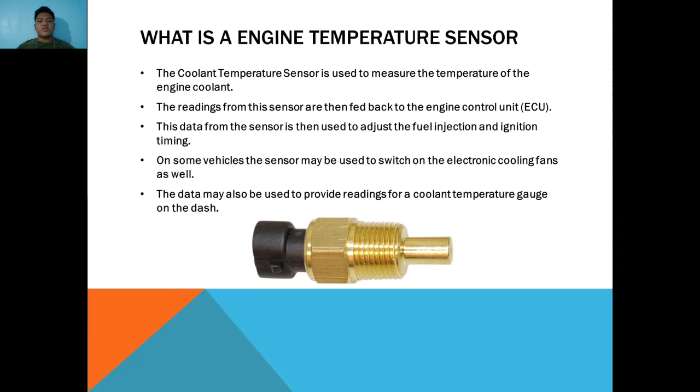But first, what is an engine temperature sensor? A coolant temperature sensor is used to measure the temperature of the engine coolant. The readings from this sensor are fed back to the engine control unit, which uses this data to adjust the fuel injection and ignition timing. On some vehicles, the sensor may also switch on the electronic cooling fans. The data may also provide readings for a coolant temperature gauge on the dash.

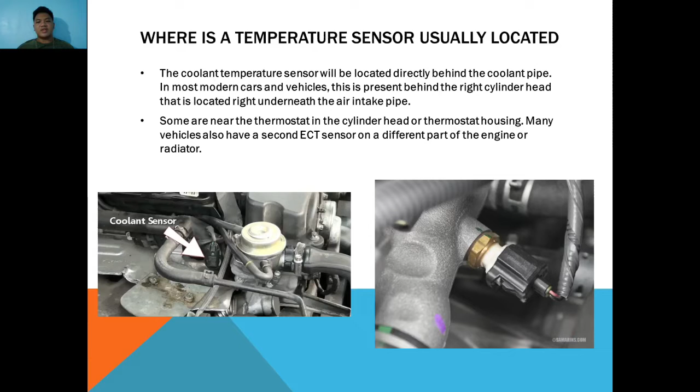Where is a temperature sensor usually located? The coolant temperature sensor will be located directly behind the coolant pipe. In most modern cars and vehicles, this is present behind the right cylinder head, located right underneath the air intake pipe. Some are near the thermostat in the cylinder head or thermostat housing. Many vehicles also have a second ECT sensor on a different part of the engine or radiator.

What does an ECT inform the ECU? When the engine is cold, the ECU adjusts the fuel mixture to be richer than normal to prevent the engine from stalling and stumbling. When it's warm, the engine gets a leaner than normal fuel mixture to maximize fuel economy while releasing the lowest possible exhaust emissions.

The ECT sensor is a high authority sensor whenever the engine is cold because ignition timing is tailored according to the engine coolant temperature. It also provides input for idle air control position, oxygen sensor closed loop status, on-off times for the canister purge, and idle speed.

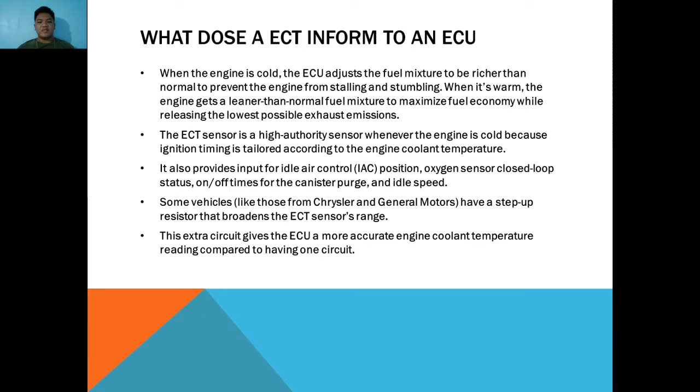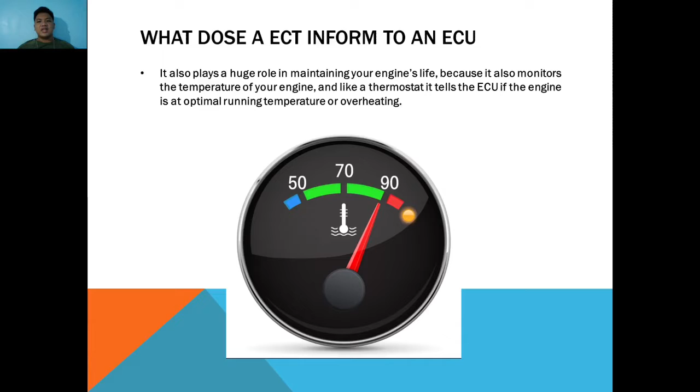Some vehicles, like those from Chrysler and General Motors, have a step-up resistor that broadens the ECT sensor's range. This extra circuit gives the ECU a more accurate engine coolant temperature reading compared to having one circuit. It also plays a huge role in maintaining your engine's life because it monitors the temperature of your engine, and like a thermostat, it tells the ECU if the engine is at optimal running temperature or overheating.

If the ECT sensor sends the wrong signal to the PCM, the engine is hot or cold when it's not. The computer can produce an incorrect air-fuel mixture and cause the engine to consume too much fuel.

Hard starting engine. The ECU relies on the ECT sensor to control the spark timing and the amount of fuel to be injected into the engine. So if the sensor fails, you could have a difficult time getting the engine to start.

Overheating engine. In most vehicles, the cooling fan uses the same sensor as the one on the engine coolant, which means it also relies on the ECU for input. If the ECU receives the wrong signal from the ECT sensor, it can stop the fan from working and cause the engine to overheat.

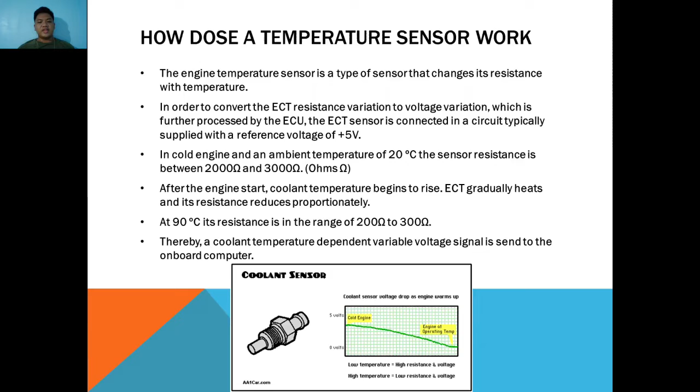Rough idling. An incorrect fuel mixture due to a faulty ECT sensor can cause the vehicle to have a rough idle.

Illuminated check engine light. Any problem with the ECT sensor and its circuit can trigger the check engine light.

Black smoke emission. A faulty ECT sensor can cause the ECU to produce a richer than normal fuel mixture, as the excess fuel burns inside the tailpipe it might produce thick black smoke.

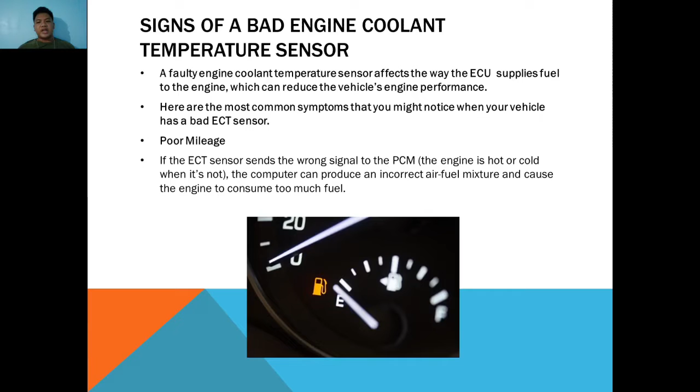Trouble codes related to a faulty ECT sensor. A problem with the ECT sensor can cause the ECU to log a diagnostic trouble code, DTC. Here are the most common ones that a scan tool might recognize.

P0116 code: engine coolant temperature sensor 1, circuit range performance. This DTC is triggered by the ECU after it detects that the voltage signals relayed by the engine coolant temperature sensor falls outside the normal manufacturer specific range.

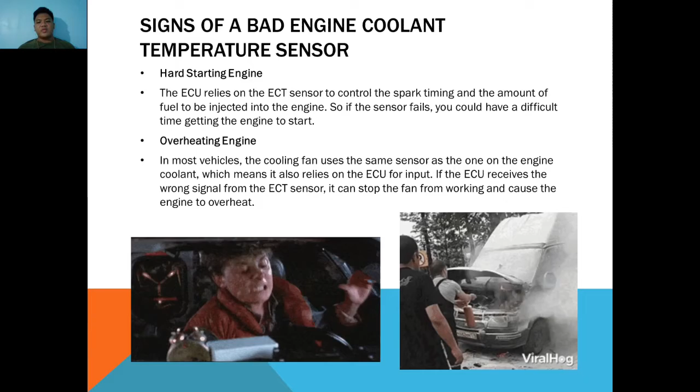P0115 code: engine coolant temperature sensor 1 circuit. This code sets when the ECU detects erratic or irrational input signals coming from the engine coolant temperature sensor circuit. The code may also register if the ECU detects an abnormally low or high voltage signal from the engine coolant temperature sensor circuit. The 1 portion of the code points to sensor number 1 in vehicles with two coolant temperature sensors.

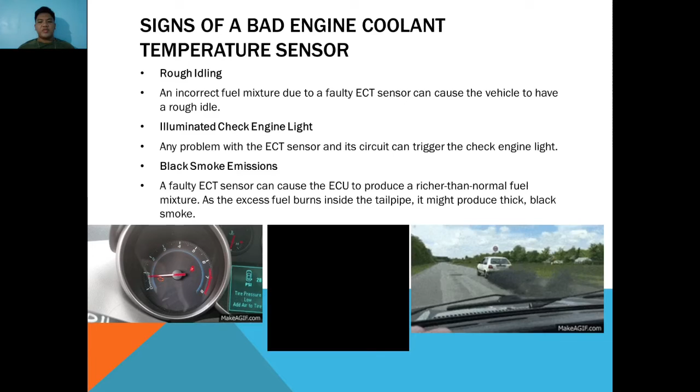P2185 stands for Engine Coolant Temperature Sensor 2, High Circuit. This code sets when the ECU detects an electrical fault in the engine coolant temperature circuit. The ECU monitors the voltage change from the ECT sensor to determine the coolant's temperature. If the ECT reads less than the expected temperature when the engine has been running for more than a few minutes, the ECU determines a fault and sets P2185. The ECU can also set this code if the ECT sensor's resistance does not match the expected values.

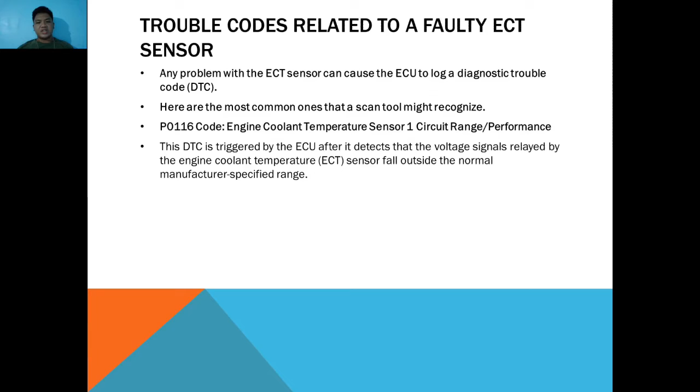P0117 code: Engine Coolant Temperature Sensor 1 Circuit Low. It indicates that the vehicle ECU has detected a low voltage input from the engine coolant temperature sensor 1. Once the ECU detects a signal voltage that's lower than the normal operating range of the sensor, the OBD code P0117 registers in your vehicle's memory. The low signal that the ECU detects from the ECT sensor can mean that the engine coolant is excessively hot.

P0119 code stands for Engine Coolant Temperature Sensor 1 Circuit, Intermittent Erratic. This trouble code sets when the ECU perceives that the input signal from the engine coolant temperature sensor is intermittent or erratic for a set period of time. If the vehicle has two coolant temperature sensors, the number 1 portion of the code points to sensor number 1.

Diagnosing ECT sensors: Before starting, check what type of temperature sensor you have. With negative temperature coefficient, these are the most popular sensors used in cars; the resistance decreases with the increase of temperature. With positive temperature coefficient, used in some older systems such as Renix, the voltage and resistance increase with the rise of temperature. You should also have a voltmeter.

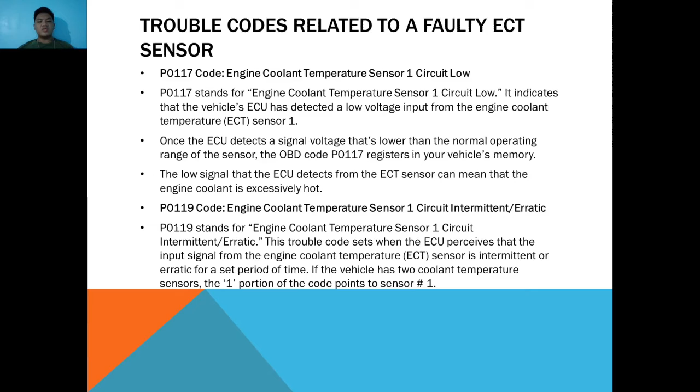Depending on the temperature, voltage reading should be in the range of 2 volts to 3 volts. The relationship between the voltage and the temperature is shown in this table. It should be around 2 to 3 volts in cold starts, because normal ambient temperature is 20 to 30 degrees Celsius.

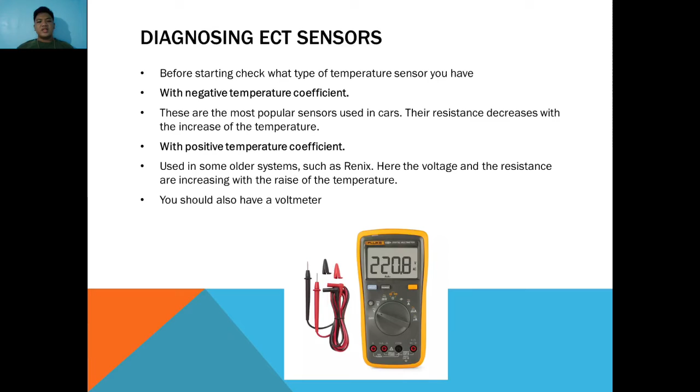Check whether the ECT voltage signal corresponds to the temperature. You will need a thermometer for this purpose. Start the engine and warm it to the operating temperature. During engine warming, the voltage should decrease in accordance with the values given in Table 1.

A common problem is that the output resistance and voltage change incorrectly, beyond its normal range. The normal value of the ECT sensor voltage is 2 volts at cold engine and 0.5 volts at warm engine. A defective sensor can indicate a voltage of 1.5 volts at cold engine and 1.25 volts at warm engine, thus causing difficulties starting a cold engine, and a rich fuel mixture when the engine is warm.

This will not generate any fault codes if the onboard controller is not programmed to detect these voltage changes, since the sensor continues to operate within the designed parameters. If such a defect is found, the ECT sensor must be replaced.

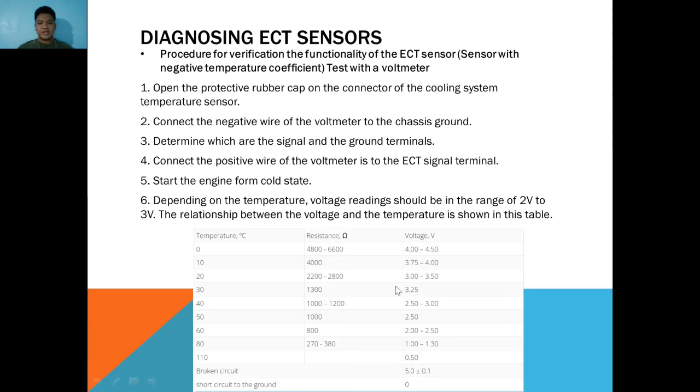If the ECT voltage signal is equal to 0, there is a lack of power supply or a short circuit to the ground. If it is 5 volts, we have an open circuit.

Sensors with a positive temperature coefficient: ECT sensors with a positive temperature coefficient of resistance is a thermistor whose resistance increases with rising temperature. It is used in a small number of systems, mainly in Renix cars. The overall method of verification is similar to the method for checking a sensor with negative temperature coefficient, described above. Received measurement data can be compared with the data given in Table 2, showing the relationship between resistance and temperature. So the procedure here is the same as for the negative temperature coefficient sensor, but instead of the voltage dropping, the voltage actually increases, as stated here.